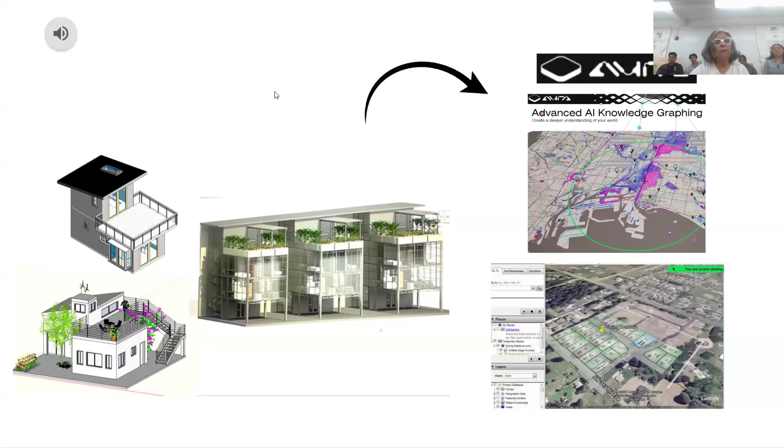Today, I'll explain our 3 housing templates and the innovative solutions behind each one. But our focus will be on the accessory dwelling unit. Let's begin with a tiny house. This design is guided by natural proportions and harmony, drawing from patterns found in nature, what people call nature-driven design. It is a net zero home built using sustainable materials, listed in the USGBC California Net Zero.

The roof includes solar panels, a rainwater collection, and a roof deck designed to grow enough food for a family of 4. Large openings on opposite sides allow for cross-ventilation, keeping the space cool and comfortable without mechanical systems. What makes this solution powerful is the flexibility. As you'll see here, even a simple template can be customized from the materials to the layout, windows, doors, and the entire program to reflect the needs, culture, and preference of the resident.

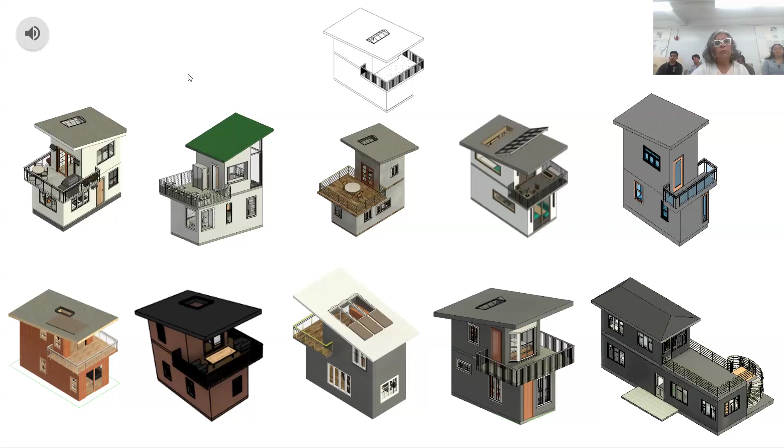The multi-unit housing template is inspired by the 5 points of architecture by Le Corbusier, offering flexibility, natural light, and open space. The first floor serves a dual purpose. It provides parking, but it also is designed as a community gathering space, a place for celebrations, quinceañeras, events, and neighborhood activities. A standout feature is the customizable back wall, which incorporates patterns and colors that reflect local culture and identity. We were honored to present this at the Masonry Summit, which was very well received.

The structure adapts as families grow or change. The second and third floor can be easily rented out, making the home work for intergenerational living and supporting economic flexibility for residents. At the top, the third floor includes a roof garden and a rainwater collection system, creating a shared green space that brings sustainability and daily life closer together.

Here you can see how the diagrams represent different parts of the house and how these elements can be arranged in multiple ways, all based on the needs and preference of the client. For example, if you prefer the bedroom to face north or want your living spaces connected directly to the roof garden, the layout can be adjusted to support that vision.

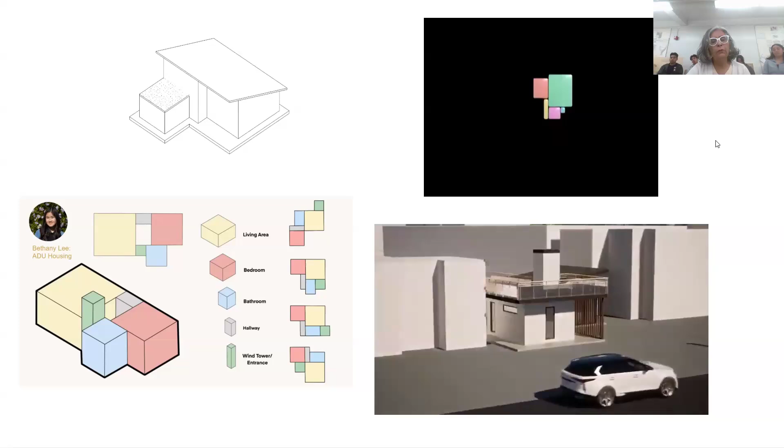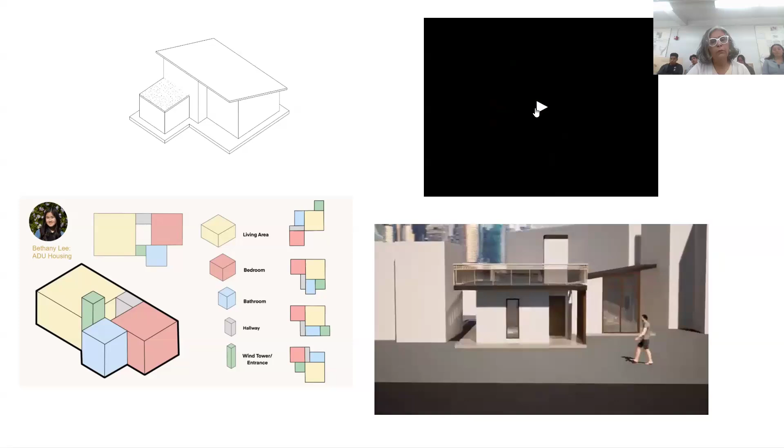This is our accessory dwelling unit template. It includes a cooling tower, a roof garden that can grow food for a family of 4, a bedroom, and a living area with a kitchen, dining room, and living room. Water strategies and air circulation are central to the design. Natural ventilation, rainwater harvesting, and passive cooling systems are integrated to create a healthy, low-impact living environment, one that adapts to both climate and community.

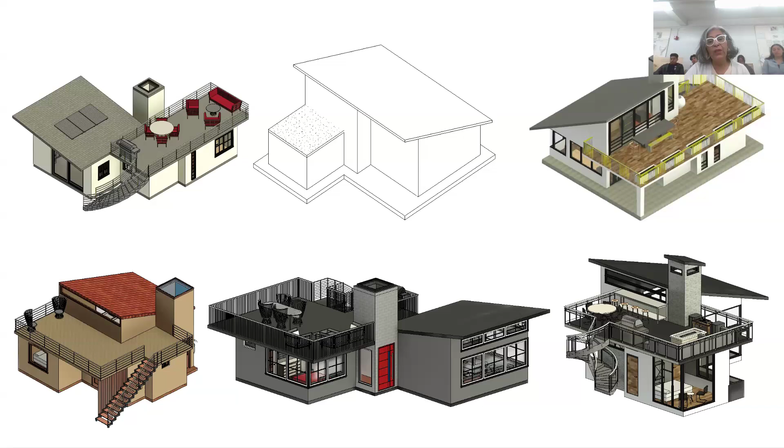So here with this template, and this is the whole idea of this proposal, is that we will have pre-approved templates, and then the community will be designing the doors, the windows, the furniture, and customize it for their own belief and system. That's why the word here is design. Now you're going to hear from each of the students. They all developed their own proposal.

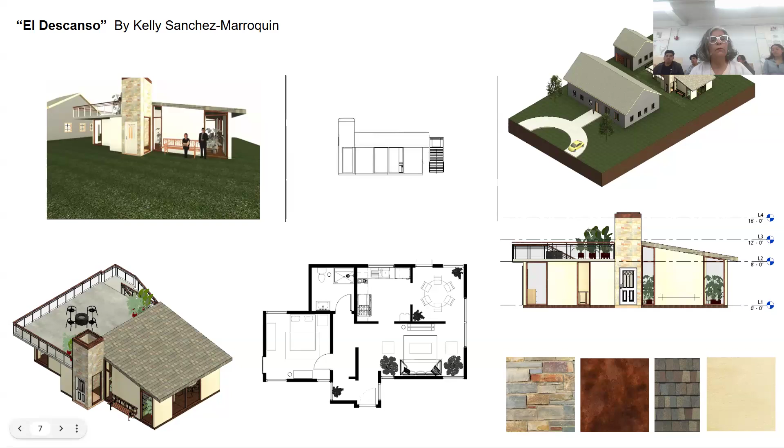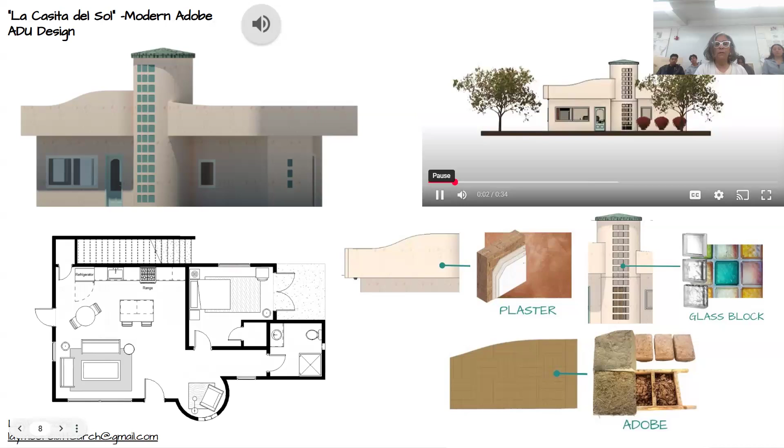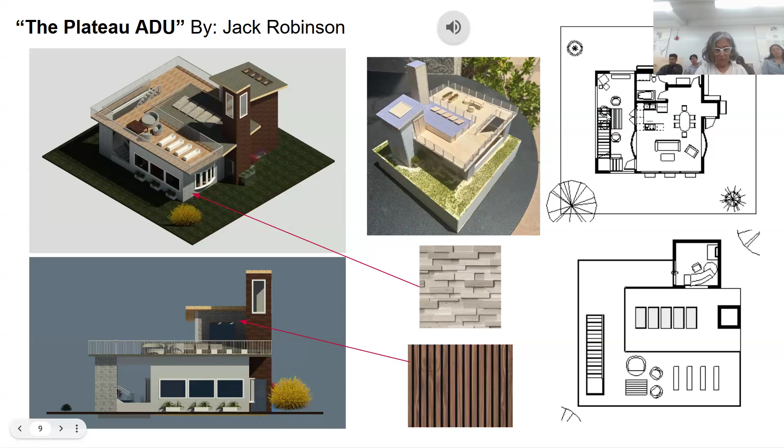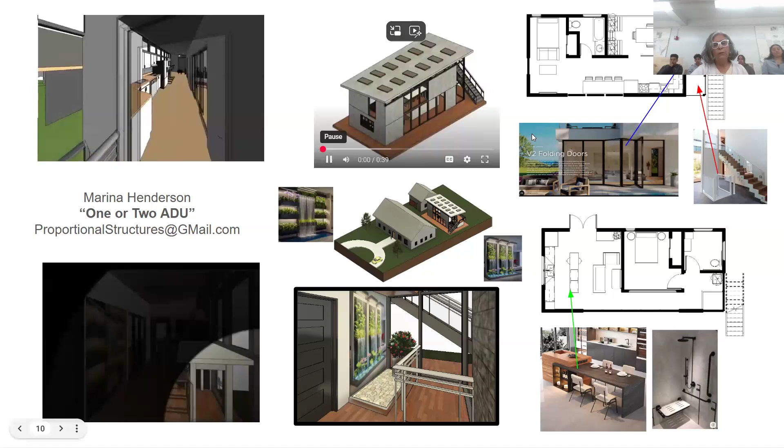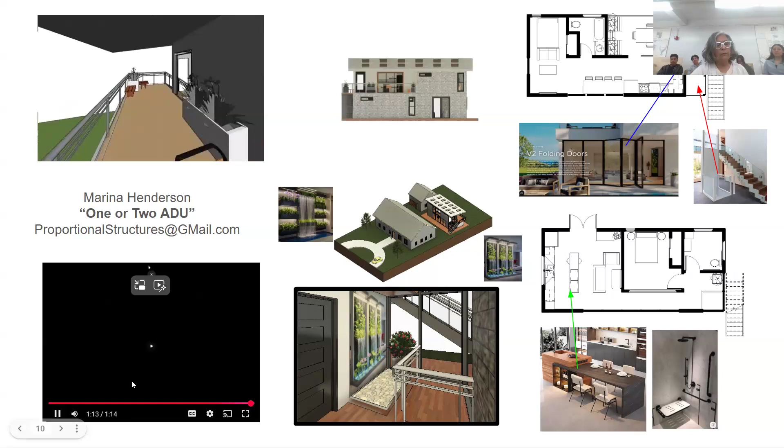Two grow walls rise, one up, one down. The lower holds more than just fertile ground. A stone therapy walk invites bare feet, a calming path where nurture and nature meet. Beside it, a lift, in openness placed, surrounded by glass, in beauty encased. It rises with light, with air, and with view, not just for function, it welcomes you.

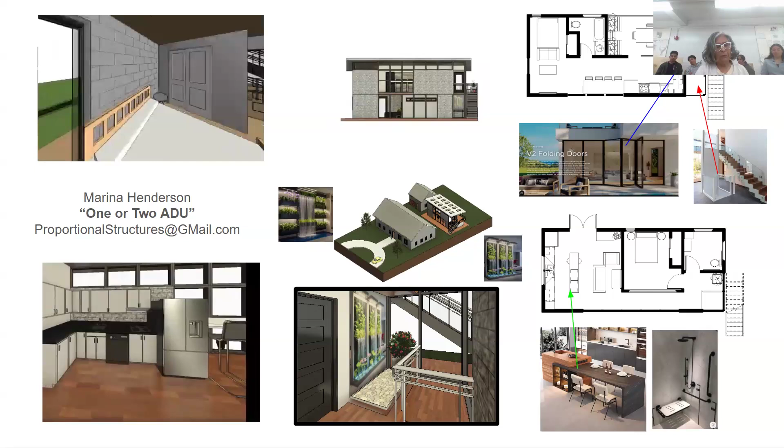The walls do more than hold up the frame. They finish the inside and carry no shame. Insulated CMUs, strong and clean, efficient, elegant, a minimalist dream. But beyond all the specs, the numbers, the cost, is the heart of the home, never lost. It's made with peace, with love, and with grace. A small sacred rhythm in architectural space. One or two ADU, it's more than a plan. It's a quiet invitation to grow where you stand.

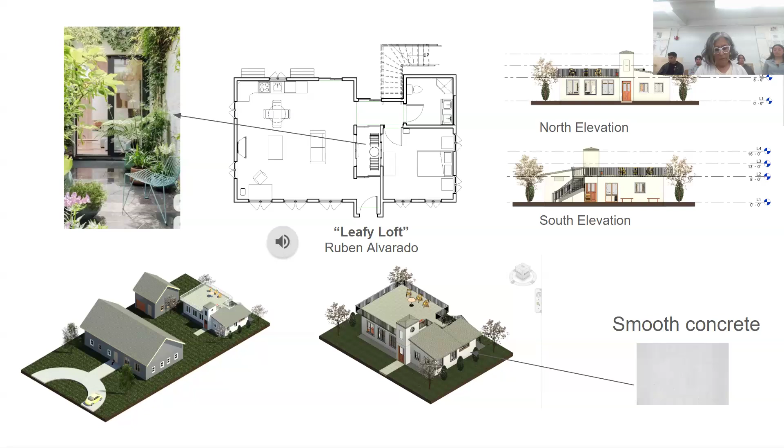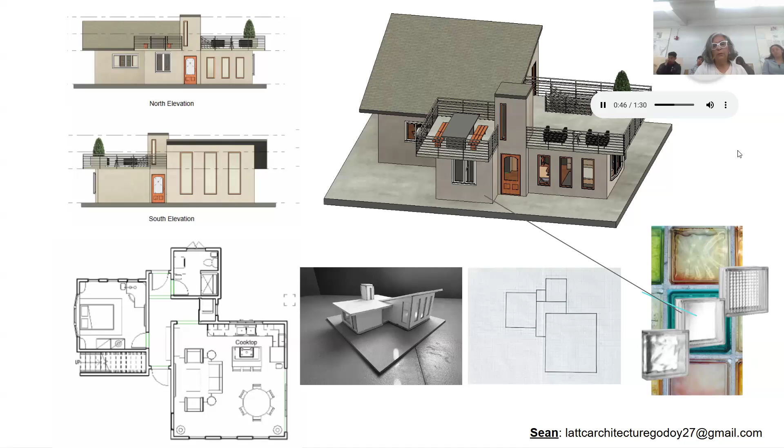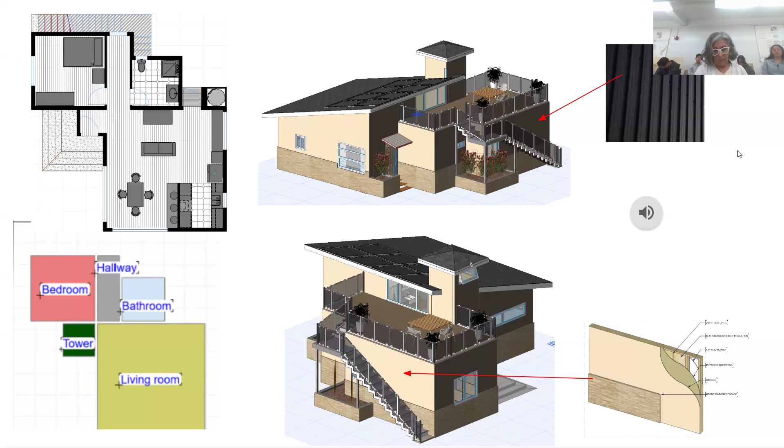The building encourages a cohesive relationship amongst its tenants by implementing things like an open kitchen/bar area and gracious window-side seating. Some sustainability features include rooftop green areas for gardening, as well as a large wind tower for a passive cooling effect.

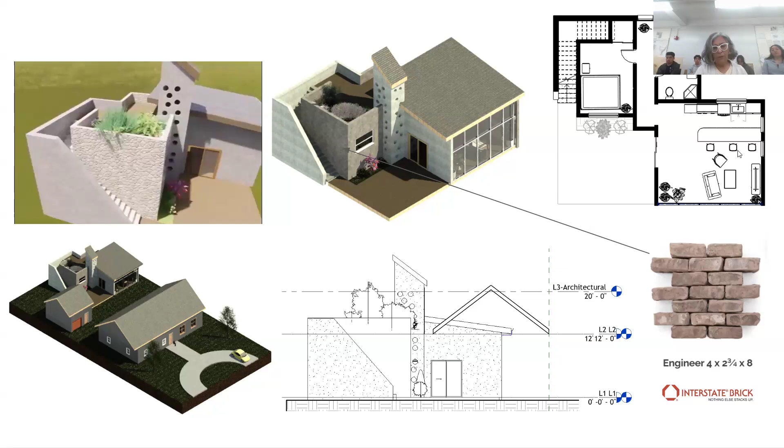This is my ADU project for ARC 173, which I've titled Natural Language. My favorite part of the design process was learning how to match different textures and experimenting with various layout options for the ADU. A sustainable feature in my design is the use of slanted roofs. They help with both sun protection and rainwater management. Additionally, the walls are designed to double as vertical trellises, supporting plant growth and enhancing the green space.

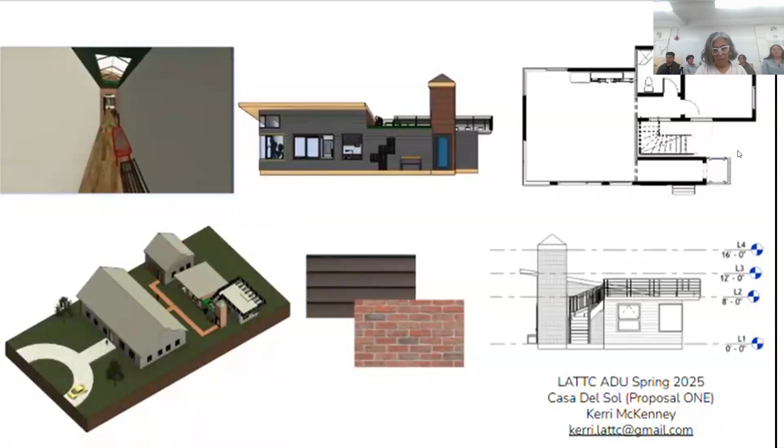Hello, my name is Kerri McKenney, and this is my project for ARC 173 Spring 2025 at LATTC. Here you can see a little walkthrough of my ADU. The corridor has a skylight leading into a room with an abundance of windows and natural light. It was important to add lots of windows and to make sure it would also fit within the perimeters of the site given. The focus of this project was to create a parti out of specific dimensions given, then create a 3D model ADU in Revit.

This included a wind tower to help with airflow or just give identity. They featured a flat roof over a portion to add functions such as family communal events or a rooftop garden. And we added masonry on portions as well to get familiar with materials. My favorite part of my ADU is that the brick wall extends through the middle of my house, making it more interesting and adding a depth of character. In this class, we deepened our knowledge and skills regarding elevations, construction documents, design documents, and materials. I hope you enjoyed my ADU.

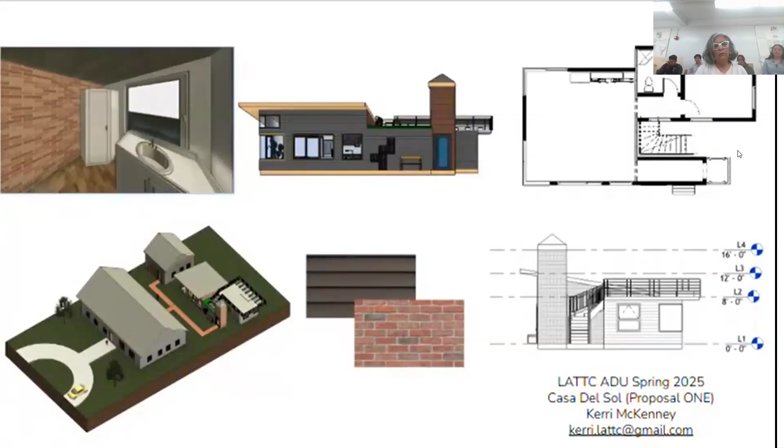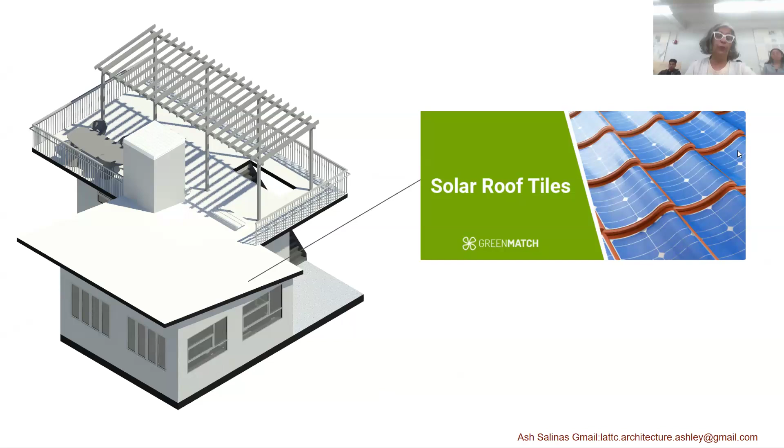And here's another proposal by another student. What I would like you to see is just the wealth of opportunities. Once you have a template, given the crisis of housing, this could really be a methodology where very quickly you can pre-approve 50% and still customize it based on the client's needs, decisions, culture, and all of these materials are part of the sustainability catalog. And just to see the growth that this kind of methodology could help in our neighborhood, I hope that's what we're trying to share with you guys today.

Wonderful. Thank you so much, Marcella and team. It's a beautiful example of a very cohesive vision for a system, but then that system is modular and it's customizable, and your students proved that in how different all of these different takes are on the same vision, same system as well. So really love seeing that.

We want to hear from our panel now, though. We've got about a half hour for an informal back and forth discussion about the project. How might we assess it? Where do you think it could go to impact the community most now, etc. And we've got two respondents with us today, Jerome Champion and John Yang.

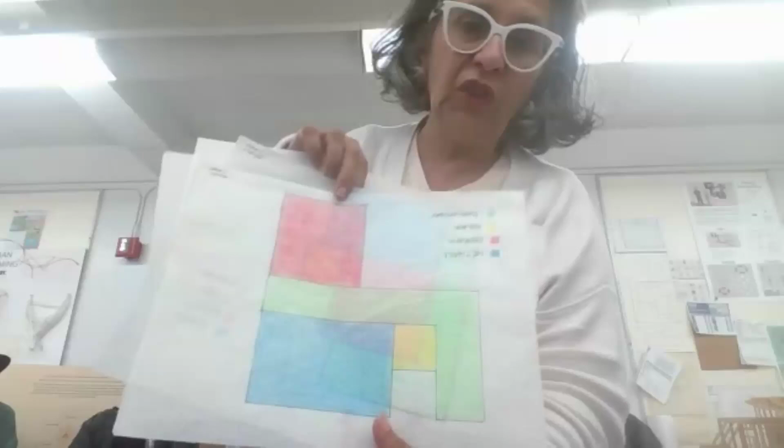The project, as I said, every semester I move it 20%, 20 for 5 years. The reason they look so beautiful is because these geometries are found from nature, from when I did my research at NASA. So these geometries, that's why they're so beautiful, because they're patterns that are found in nature. So they're not random geometries, they're very mathematical. So we've been studying these for a long time. That's why they click so well together.

They're really beautiful. And these are all the geometries that you find on a cell, you find on the human body, you find on a flower, you find in the sky. So when they say nature-driven design, it's like, what about if we design like nature? So all these houses at their essence are very mathematical. They follow those formulas from nature.

I'd love to see pictures of a prototype in Nicaragua. That'd be wonderful to include in the presentation somewhere. Yes, yes. You know, it's fascinating. I mean, it's hard to move anything to a prototype, and the fact that you've been able to, and I love the idea that a student just simply took it and said, "I'm going to build this," and went there and built it.

Yeah, that's my goal, that they come to school 2 years, they get at least 4 certifications, BIM, CAD, GIS. That's what the Annenberg Foundation will cover, that was given to Pando projects recently. Well, it's in the works, but it will be for the students to get certified, but also to walk with a set of construction documents that say, oh, my aunt has space, let's do a tiny house. And they come as investors because they bring the set of construction documents.